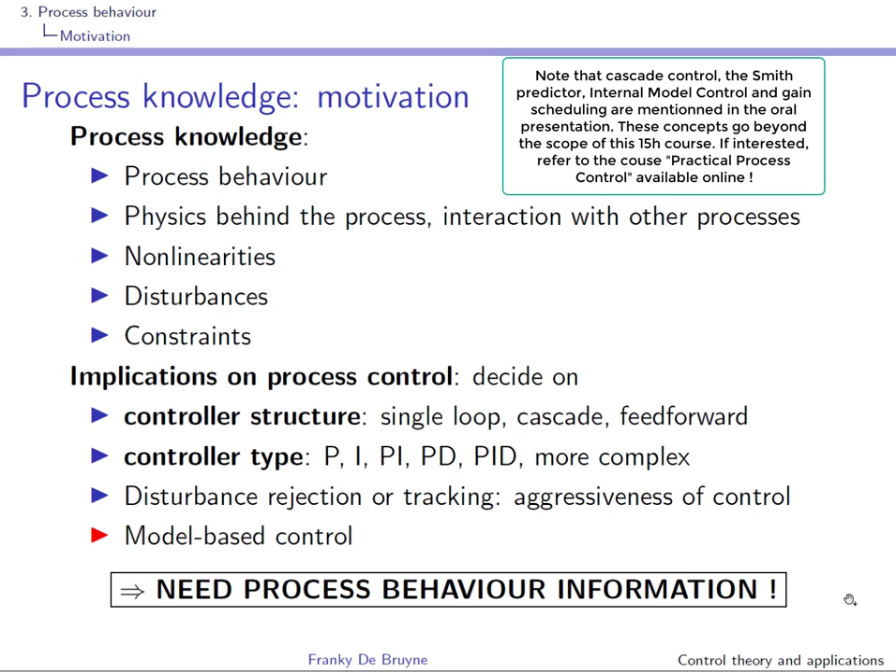At the end of the course, you should be able to select the appropriate controller structure, the appropriate controller type, given your knowledge of the process. This means that at the end of the course, and especially at the time of the exam, you must have a mental picture of all the available controller structures and controller types with their associated area of application.

We'll start this section on process behavior with a very important but rather simple concept, the concept of the process gain. In order to obtain this process gain, what is usually done is to apply or impose a step at the input. The input is MV, the manipulated value. So the increase will be delta MV over here. So what you're going to do is observe the response of the system, and of course, since the system is almost always dynamical, you'll have a response that could be this one.

Well, the idea of a gain is really the ratio in steady state. So this means that the transients have disappeared because the system is dynamic. After a while the transients will disappear and you'll have, after settling, a delta PV. And the process gain is really the ratio between this steady state increase delta PV over the delta MV that has been imposed, and we'll denote this gain as Kp. Kp has units, it's the units of PV divided by the units of MV.

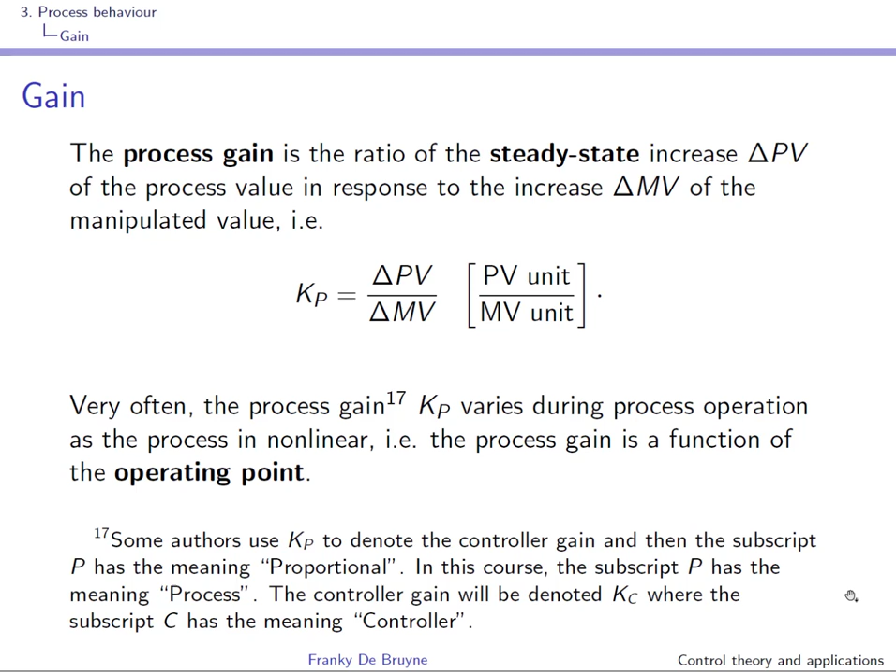The next type of process behavior that we tackle is process delay or dead time. So here you have an example of a transporter belt or conveyor belt, and there is transport of material between point 1 and point 2. So W1 and W2 here are linked simply by this relation over here, right? There is a delay in between W2 and W1.

This delay can simply be computed over here. It's the distance that has to be covered, in meters, divided by speed, and this leads to a delay, and of course it has units seconds, right? You can see here that this delay is throughput dependent, so it depends on the speed of the conveyor belt.

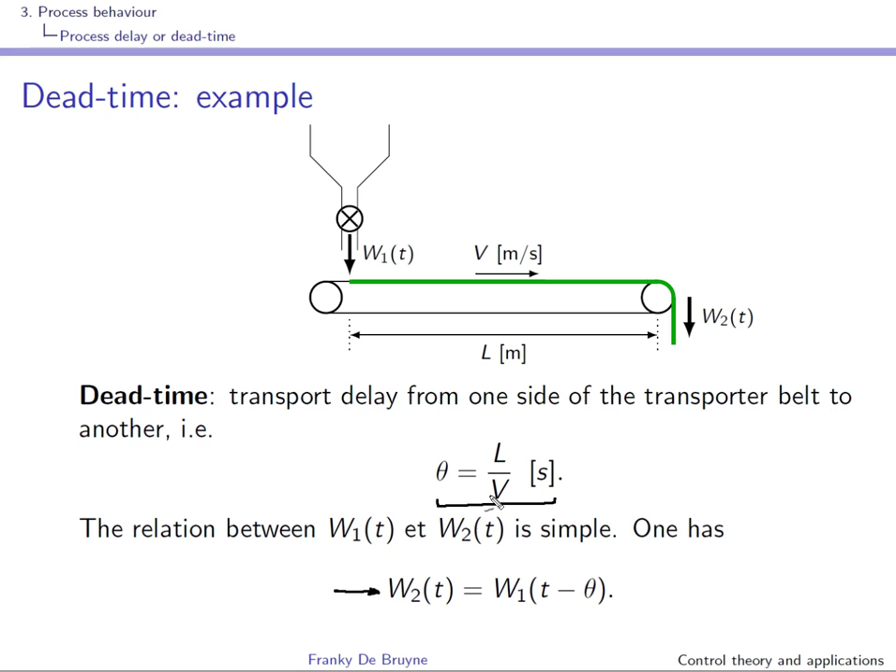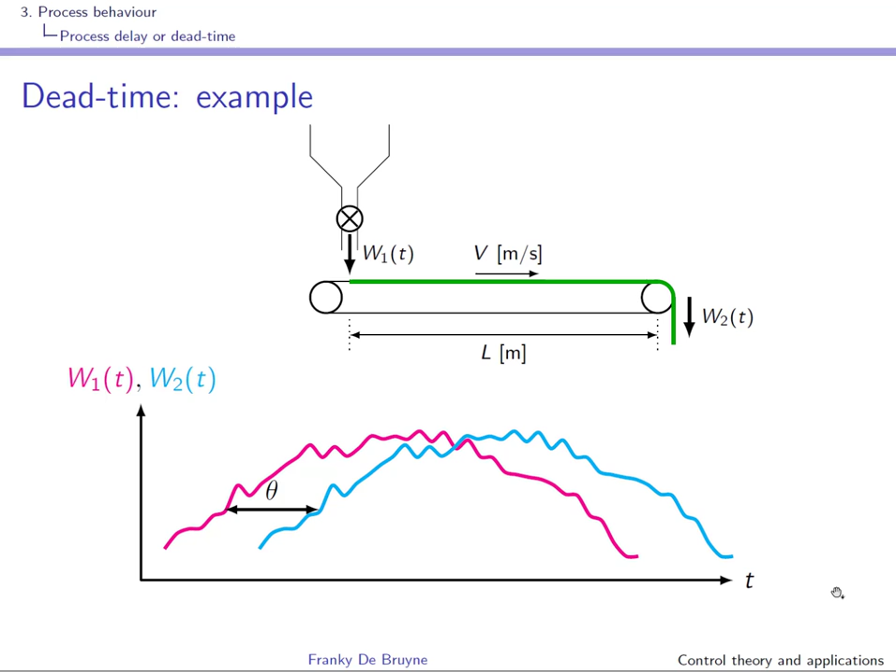Here you can see things visually. W2 is a delayed version of W1. You can clearly see that there is no amplification or attenuation, right? There is just a phase shift. As we have seen, dead time is throughput dependent. It depends on speed, but it can also depend on a flow.

Causes are transport. I've already talked about the transport of material in the conveyor belt, but also a bad location of the measurement can introduce delay. For instance, a sensor can add delay, and of course when you're sampling the system there is a delay that is due to the zero order hold mechanism. In this course we'll assume that TS is sufficiently small that this zero order hold mechanism has very little influence.

The succession of several time constants has also the effect of a dead time. We speak of an apparent dead time. So let us have a look at that. We take several first order systems in series. So let's just take 3. And we will look at the step response, right? So at the input we apply a step, and then we're going to have a look at this step response.

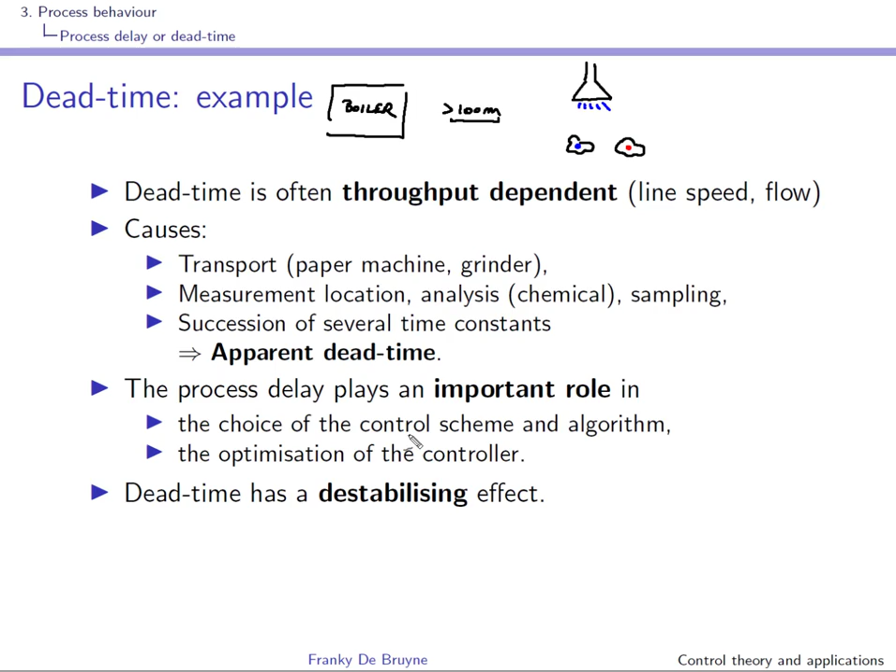Well, a delay in the time domain is really PV(t) equal to MV(t minus theta), and if you go to the Laplace domain, this is what you obtain. Remember, to have an idea of the frequency response, we need to take P(s), evaluate it at s equal to j omega, and then take the module. This is the module of P(j omega), used in the top part of the Bode diagram, and then you need the argument of P(j omega).

In our case here, the process P(s) is simply exponential of minus theta s. So if we replace s by j omega, this is what we obtain: exponential of minus j theta omega. And this is in polar form, so you can clearly see that the magnitude is 1, and the argument can simply be read: it's minus omega theta. So there is no need to do a calculation like this because this is obvious.

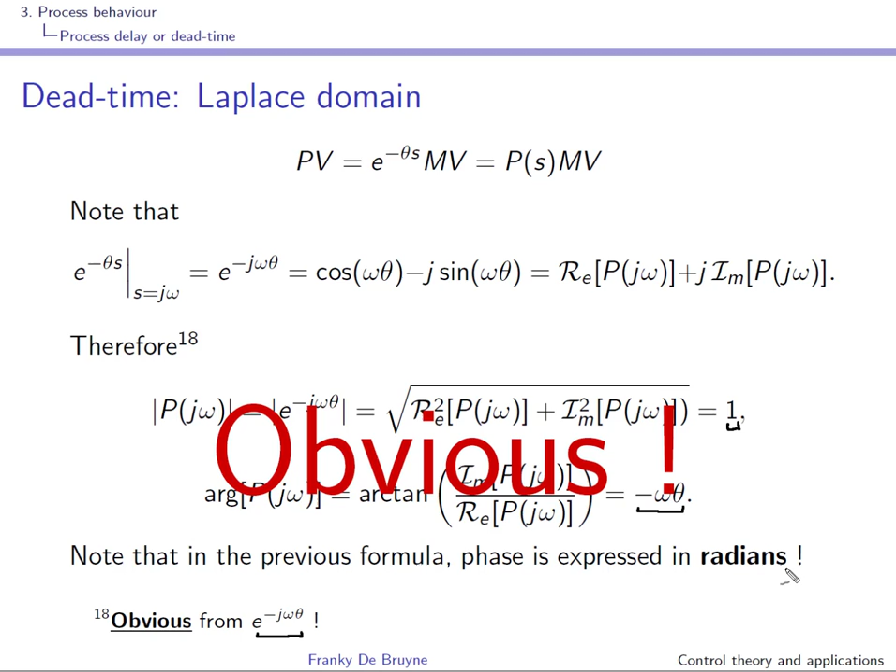You simply take the transfer function, replace s by j omega, and you can immediately see that the module of the gain is 1 and the argument is minus omega theta. Observe that in the previous formula the phase is expressed in radians. This is important. Well, this is the frequency response for this process delay or dead time.

We had seen that the module was 1, and the argument of P(j omega) is simply minus omega theta. So there is no influence of frequency on magnitude, and if you use dBs, the magnitude plot in the Bode plot is equal to 0 at all frequencies. Here we see that the phase shift is increasing with frequency, a linear dependence on omega, but remember we have log frequencies here, so we see this exponential behavior.

You can see that you have a phase shift of 1 radian where omega theta is equal to 1. This is 1 radian, approximately 57 degrees. So where omega is 1 over theta, we have a phase shift of 57 degrees. Here we have theta equal to 1, so 1 over theta is 1 radian per second, and indeed here we have a phase shift of approximately minus 57 degrees, which is 1 radian.

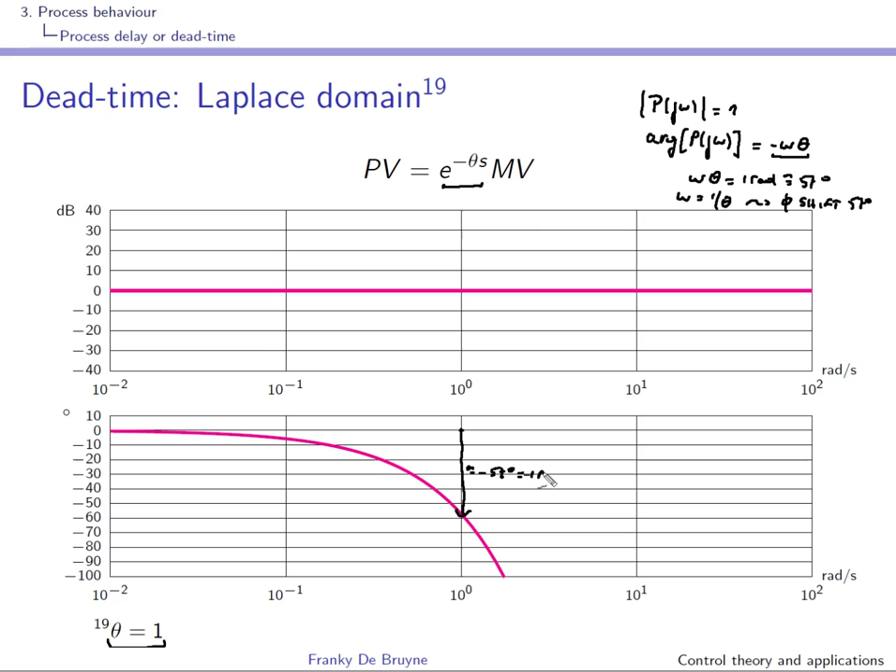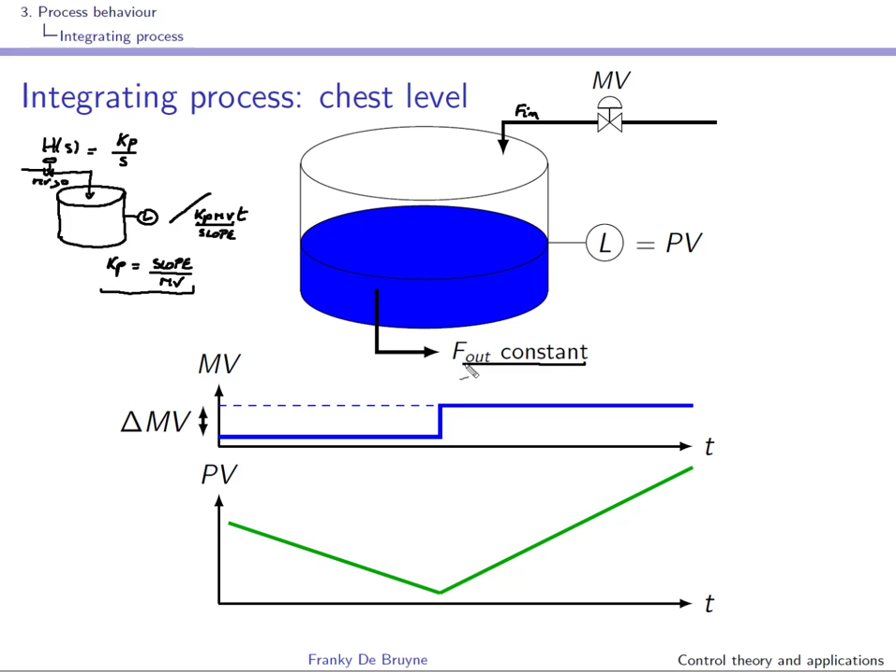As you can see, the level is decreasing, and after our step we can see now that the level is increasing, and this is telling us simply that now in this second situation, the input flow is larger than the output flow.

In this slide we have the same situation as before, but we have added a delay, and as you can see, the delay can really be determined rather easily. You can see that after we have had the change of MV, it takes a delay of theta before you can observe the change of slope.

So remember that we have a process here that is integrating. It will have gain Kp, and it is an integrating process, right? And what we want to do is to determine Kp. We have done this experiment on this integrating process where we had this unknown output flow. So what you need to do is to compute the slopes before the manipulated variable change and after.

How do you compute the slope? Well, you set a period delta t1 and you look at the change in delta PV, right? So slope 1 is delta PV1 over delta t1. You do something similar to compute the slope after the manipulated variable change, and you'll obtain slope 2 and slope 1 experimentally.

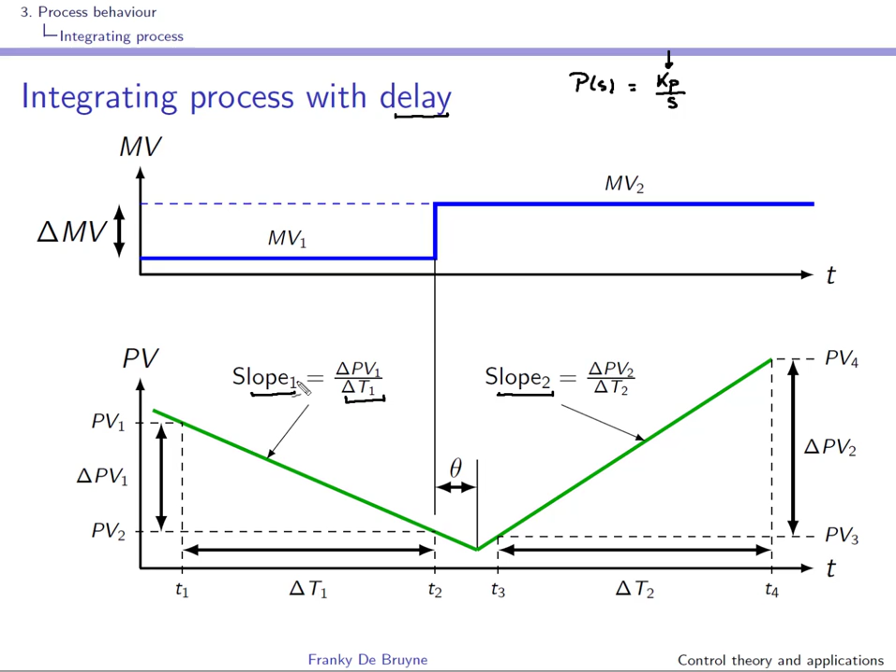We have here our process in the Laplace domain, and it's Kp over s, right? And in the time domain you can write it like this. Note that for such a process, if MV is equal to 0, then PV is constant. If MV is positive, then PV will be growing linearly, and if it's negative, PV will be decreasing.

Here we have a constant MV, so the output will be Kp times this constant times t. So what we see over here is the slope, and we have determined this slope experimentally. What you see over here is the slope for the second operating point MV2, and we have also determined this slope experimentally.

So we have here that Kp MV1 is this slope that we have determined experimentally, and we have something similar for Kp MV2. If we subtract both equations, this is what you obtain, and you can see now that you can obtain Kp experimentally from the experiment shown in the previous slide, and this is done independently of F out. Of course, F out has to be constant.

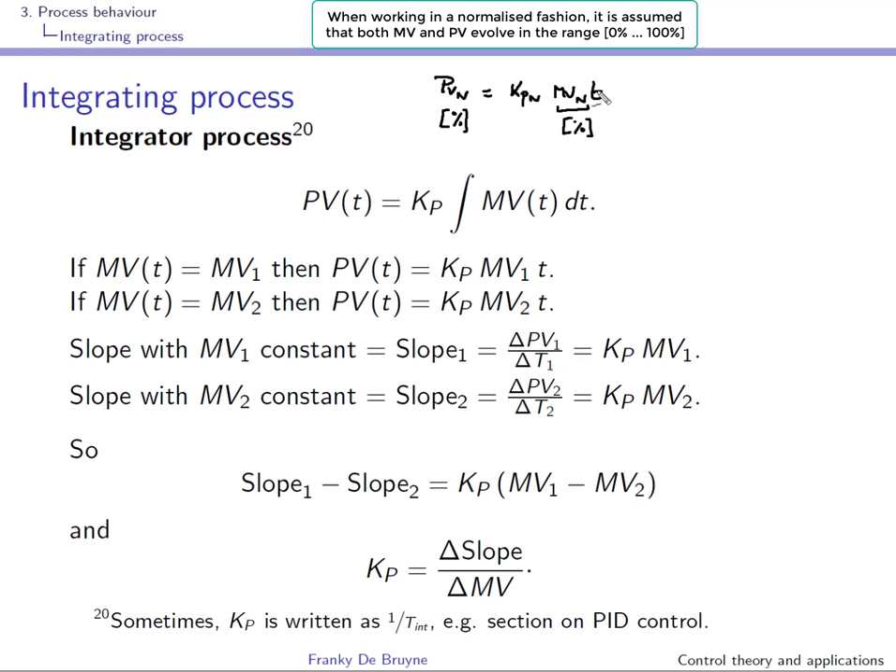This has units of time, so this one must have units 1 over seconds. So this is why Kp is often written as 1 over a time constant when Kp is the gain of an integrator, and this will be the case in the section on PID control. The integral action will be 1 over Ti times the integral of the control error, and you can see here that the gain of the integral action has been written as 1 over a time constant.

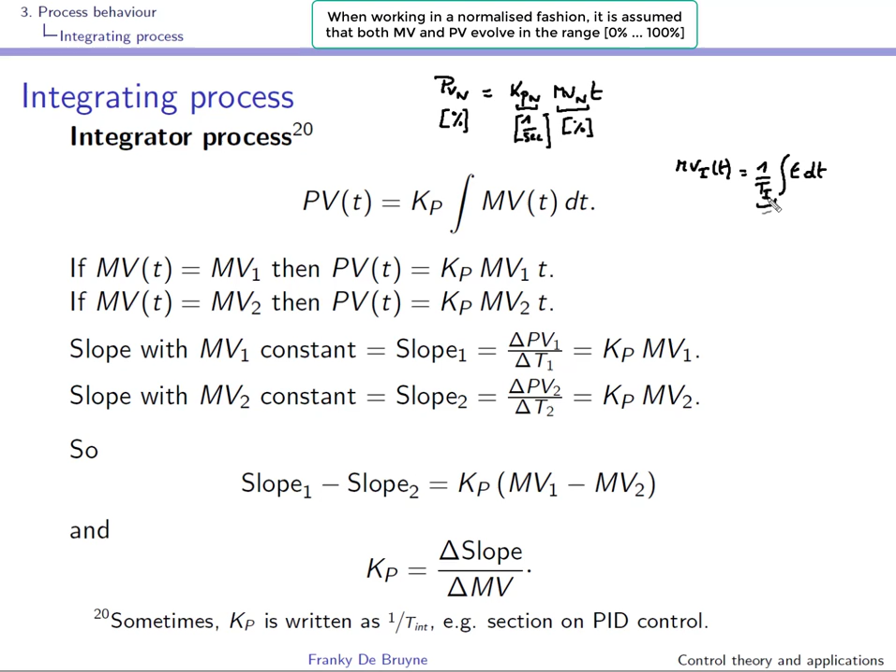We have just seen how we can obtain the gain of the integrating process experimentally, but very often you do not need to do experiments. For instance, the level of the tank is linked to the input flow by an integrating system, and the gain is 1 over the section of the tank. The voltage on a capacitor is linked to the current by an integrating process, and the gain is 1 over the capacitance.

And you could add that the current through an inductor is linked to the voltage by an integrating process, and the gain is 1 over the inductance. Coming back to the example of the level in a tank, if the tank is lying on its side, then things look like this, and the relation between the level and the input flow, F in, becomes non-linear, because depending on the level in the tank, the tank section will vary.

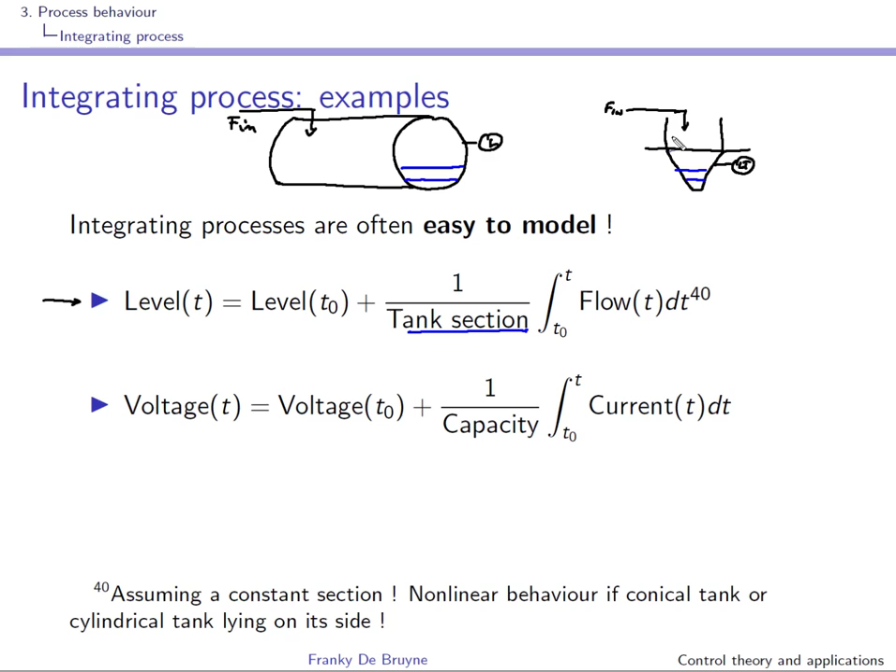So for instance, in this region over here below this line, the relation between level and input flow will be non-linear, as the section is changing all the time. When you're above this line, of course, things become linear again, and then you have the standard integrating process again.

We can now have a look at the frequency response of this integrating system. Remember that we have to take P of s, evaluate at s equal to j omega, and then take the module and the argument. In our case, we'll have Kp over j omega. The module will be Kp over omega, and the argument of P of j omega, because of this 1 over j here, is minus 90 degrees, and this is clearly observed here in the phase Bode diagram, right?

So now we have to look at the module. You can see that this module is evolving as 1 over omega, but in a log frequency Bode plot, this looks like it is evolving linearly, right? And the slope here is minus 20 dB per decade. Where is this coming from? Well, we are working in dB, so we have to take 20 log10, and I'll look at what happens when I multiply the frequency by 10.

So we'll have Kp divided by 10 times omega, and we'll use the formula that log of A times B is the log of A plus the log of B, and this is true in any base, so also in base 10. What we'll have here is 20 log10 of Kp over omega. So this will be the gain at the frequency omega expressed in dB, and here you'll have plus 20 log10 of 1 over 10, right? So this one will be minus 1 times 20, so this is minus 20 dB.

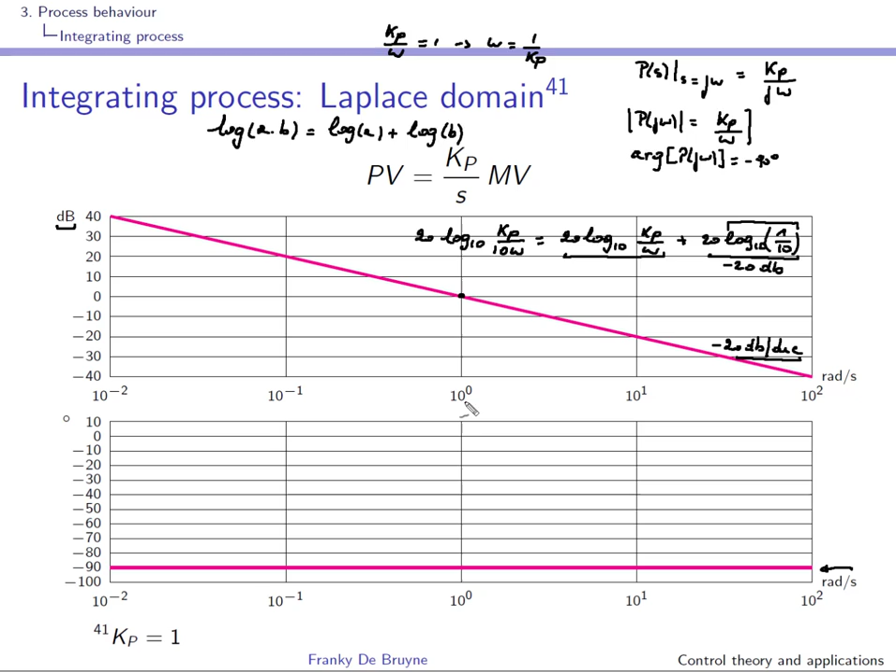Another important fact is that you can determine the gain by just looking at this Bode diagram. The frequency at which Kp over omega is equal to 1 is, of course, omega equal to Kp, right? In our case, Kp is equal to 1, so the frequency at which we'll have a gain of 1, which corresponds to 0 dB, is indeed here at 1 radian per second. This is more intuitive than you think.

If you take an integrating process, 1 over s, and at the input you apply cosine omega0 t, assuming that you're at steady state, what will come out, if you integrate this cosine, is the sine of omega0 t divided by omega0, right? And the sine is really a cosine that has been shifted by minus 90 degrees. So this is what you see over here. The gain is 1 over omega0. The smaller the frequency, the higher the gain. And this is also what you see here in this Bode diagram.

Let us look at the following loop. So we have an integrator, Kp over s, and this very simple loop with a minus and a plus over here, right? And we'll put a 5 at the input over here, and we'll ask the question, what are the values in steady state? Well, the only steady state that is possible is to have a 0 over here. If we have something positive, it will be integrated and it will evolve, so it's not steady state anymore. So if we have a 0 over here, it means that we have a 5 and a 5 over here.

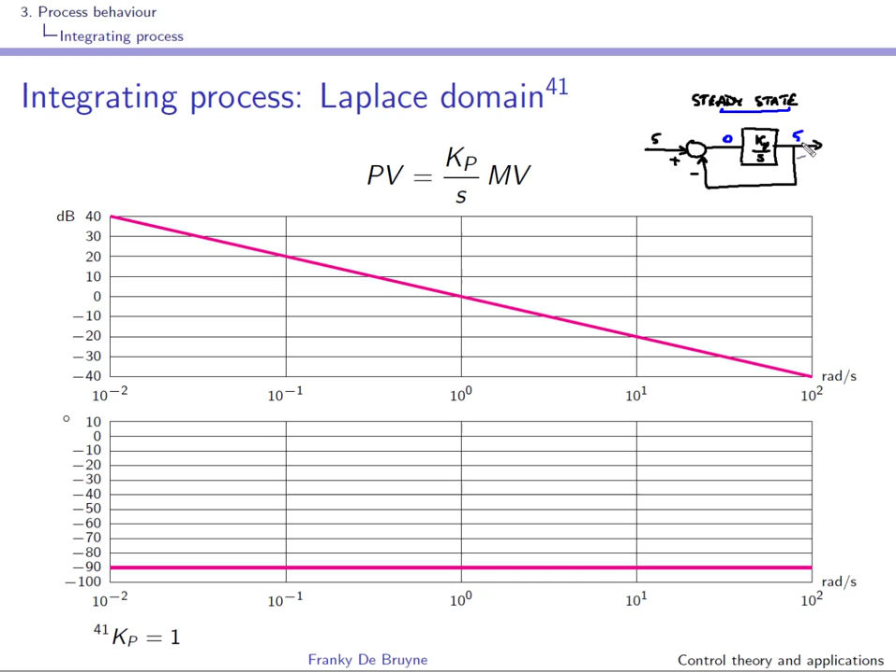So here you can clearly see that in steady state the gain is infinite, and this is indeed what you see here in the Bode diagram. And when you encounter a process where you have an input that is 0 and an output that is finite and non-zero, this means that there is an integrator in this process causing this effect, and this integrator will cause an infinite static gain.